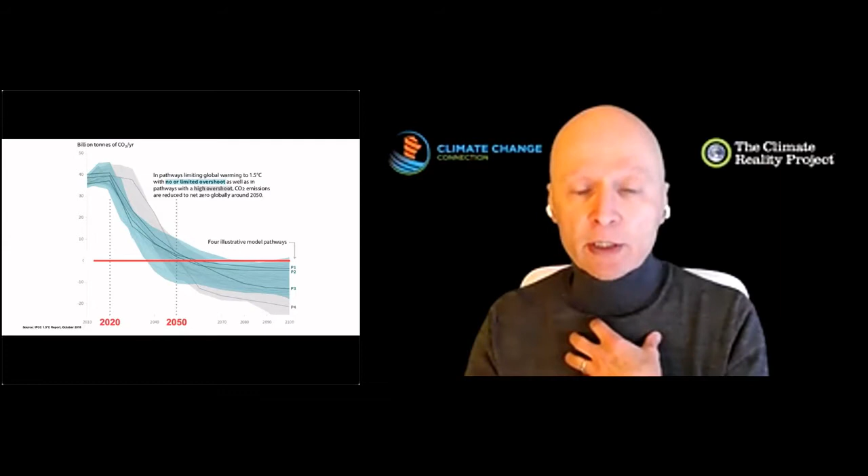Because even in Manitoba, if you talk about climate change, most of the time people go, oh, we're going to have warmer winters. Well, maybe, but there are also consequences that are much more dire for other people. We're talking about climate migrants. And when climate migrations happen on a large scale, potentially you wind up with global conflicts. And besides the human tragedy and devastation, there's also economic consequences. When those things may be happening halfway around the world, and we don't necessarily see them other than on the news, the economic consequences can be immediate and felt here very sharply.

So we have a challenge that we need to meet. If we're going to address that, really what we're talking about is building our resilience. In other words, we have to be able to meet our essential needs ourselves without fossil fuel. And when I talk about essential needs, we're talking about the three areas of food, transportation, and shelter. So there are questions within those three areas, challenges that we need to address.

We need to be able to feed ourselves locally without fossil fuel fertilizers. We need to be able to move all goods and people without gasoline or diesel. And then the challenge we're dealing with here today: we have to be able to heat all of our buildings, old and new, affordably and without natural gas. That's the challenge before us, and what we're addressing here today.

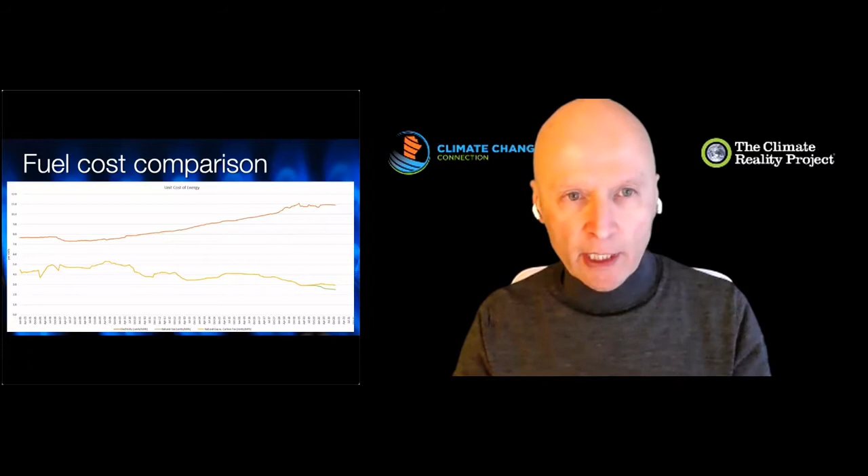So the cost of natural gas is not working in our favor. The cost of natural gas is going down as the cost of electricity is going up. So that's working against us.

But hydro could make more money if they were to sell electricity at the domestic rate rather than exporting it at the 2 cents a kilowatt hour that they have been in the past. So there's opportunity for hydro if they were to sell more domestically. And our economy is currently leaking money by importing these fossil fuels.

So there are opportunities when it comes to addressing this issue, this challenge. The pathway in general terms is, first of all, the envelope of our buildings, making our buildings more efficient. And we need to make our new buildings more efficient through an enhancement of the building codes. It's now not really as challenging as it needs to be, put it that way.

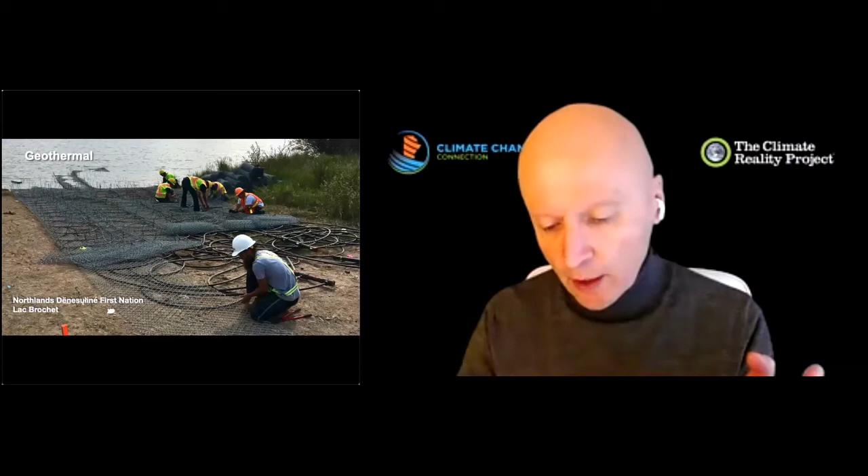Heating - making more use of solar passively, making more use of biomass, making more use of district heating, and the three key aspects of heat pump. We've got ground source heat pump, lake or water or stream-based heat pump, and air source heat pump.

And I called up the wrong presentation. The last slide that I was going to show has to do with energy storage. Energy storage is where we can take these renewable sources, which are intermittent, and store the energy. There's various strategies for that, including batteries or chemical storage potentially, or the use of hydrogen, electrolysis, hydrogen that comes from electrolysis.

So that, in a nutshell, is the frame that we're going to be diving into more deeply now with our next presenter. Our next presenter is going to be Donald Proven. Donald is a certified passive house consultant and tradesperson. 8 years ago, he and his uncle Randy and his cousin Evan and his father Rick Proven started Sun Certified Builders Co-op. Sun Certified Co-op delivers outstanding high-performance building design, construction, and renovation solutions. They've been improving building energy performance in existing homes and building new ones using Passive House Institute energy modeling tools and building science principles. He has over 30 years of high-performance building experience. Donald, please give us your perspectives on this challenge.

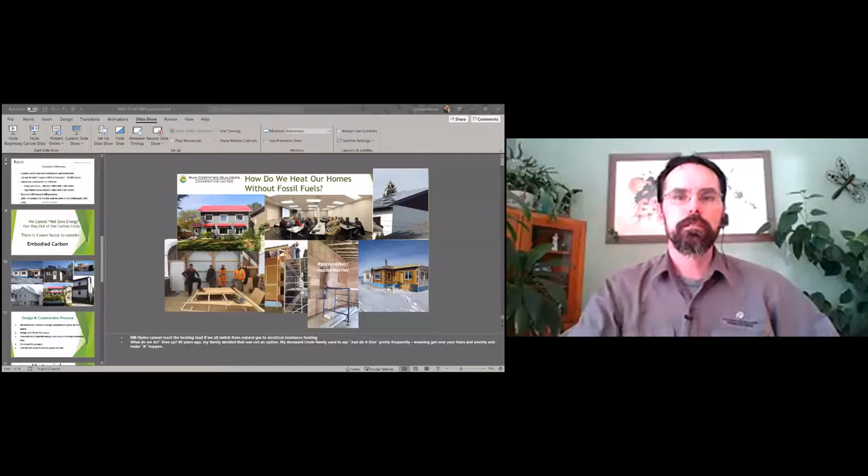Kurt invited me to the Sustainable Buildings Manitoba event, and the question was, how do we heat our homes without fossil fuels?

Our take from Sun Certified's perspective is to do what we've been doing all along, which is build high-performance buildings. This is just a quick sample of some of our projects. Some of the folks on the call here live in a few of these houses.

One of the key aspects to achieving this goal, heating our homes without fossil fuels, is education. Pre-COVID, we were able to travel to Alaska to do a presentation on this very thing. There was quite a turnout, as you see, in Anchorage, and it was kind of an interesting experience for us. We hadn't done really anything down in the States before.

So I want to jump right into solutions. Kurt touched briefly on some of the basics, and I'm going to do that as well. It comes right down to how do we reduce the building energy demand to the point where we can switch to electricity.

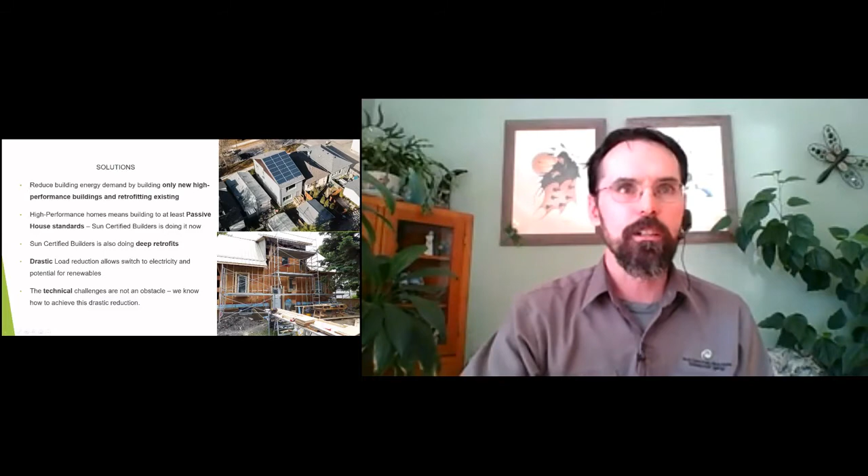In our view, the technical challenges are no longer an obstacle. We're trying to build our walls, prefabricate them off-site, and have them shipped to the site. There's what it looks like. We don't have a grand factory yet, but we're going to.

We're continually trying to improve what we do, because the building trade or building industry has undergone a significant change in the last 15 years or so, but most of that is related to technology. The design, modeling, and technique aspects of how we go about building, especially single-family dwellings, has really lagged behind, we feel.

There's been changes in the way we go about building larger buildings, which we don't involve ourselves in so much yet, but there's been lots of progress there. However, the single-family dwelling industry has really lagged behind. We always say that we're still stuck in the 1950s in terms of how we build our single-family dwellings.

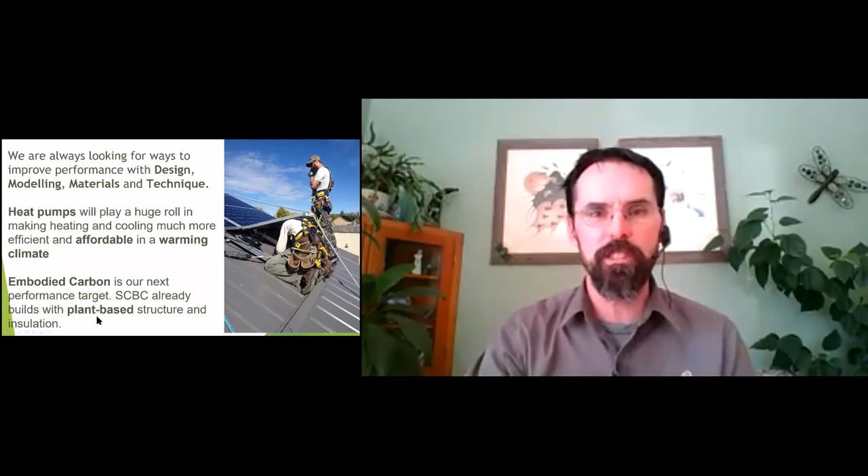Because the building industry can have a fairly significant impact on the carbon balance by using our buildings and how we do this as one of the tools, that gives us a bit of leeway to address the other two key areas: food production and transportation in society.

If we don't do that, then we're missing these huge pieces of the puzzle. It can't be independent of those other solutions. We have to work with that. And if we have buildings that can store carbon for long periods of time, we feel we can contribute to the solution, and that gives us more time to deal with other aspects of society.

So in the design process, you have to set goals for your buildings. Otherwise, you're not going to achieve any sort of target. We're not going to achieve savings economically with durability or energy efficiency unless you have something that you're going to shoot for. So energy, durability, comfort, carbon, and economic performance have to be targets that we're shooting for. Passive House, as I mentioned, is a tool that we use to provide us with targets and methods and modeling to achieve those high performance buildings.

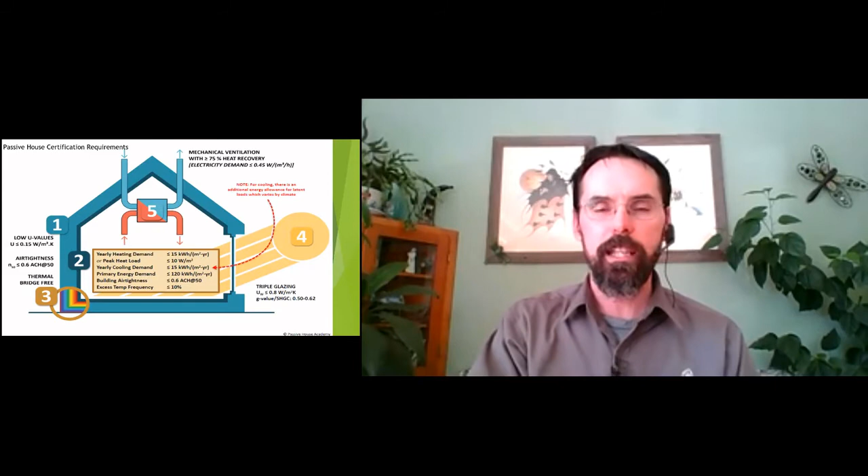These, again, are the principles that guide how we do the buildings. Thermal insulation, Kurt touched on that. The building enclosure - you have to start with the fabric of the building as part of your design. You have to have a system in place to achieve that overall building thermal performance. You can't have parts of the building poking to the exterior that are going to conduct cold and heat and moisture. That's called thermal bridge-free design.

You have to have really good windows so that they don't leak and they don't make it uncomfortable to sit by at a cold -40 night. You have to have very good ventilation so that your building's not going to have problems interior with moisture and with stuffy air. You have to be airtight to begin with so that, again, you're not leaking that heat and moisture into the system.

And there's some simplicity of shape and some design that goes into designing these buildings.

I want to talk about economic efficiency because that's an item that comes up frequently. We get asked all the time, well, how much more expensive is it to build an efficient building? We have tools available to tell us that overall it does cost more generally, because we're putting in quite a bit of insulation, better windows, a heat recovery ventilator and things like that. But overall, when you decide to go down the high performance path, you end up with economic return almost immediately.

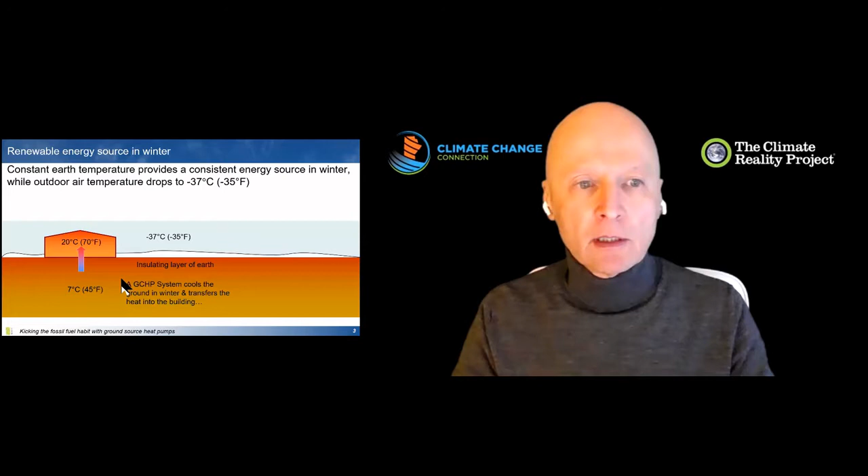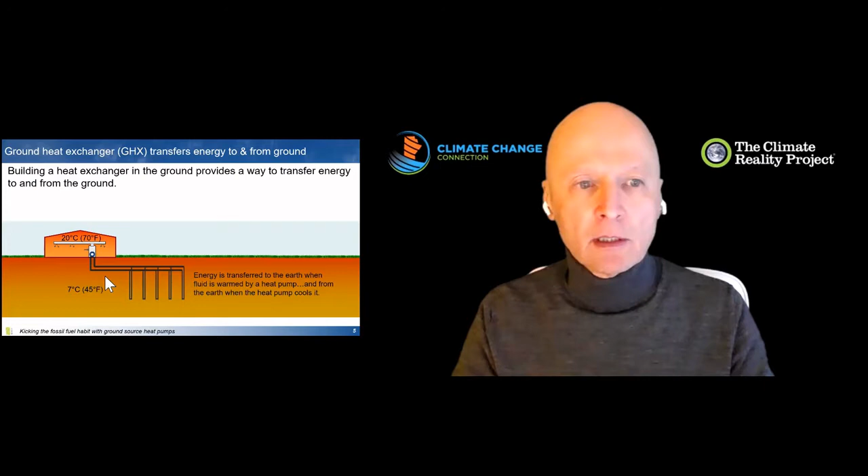Yep, okay. The ground itself in Manitoba is about 45 degrees Fahrenheit, or about 7 degrees Celsius, and we can pull heat from that very easily. Compared to an air source heat pump, the ground's temperature stays fairly constant, so it allows us to take heat from it all winter long without any auxiliary. It also allows us to dump heat into the ground very easily when we're cooling a building. The way we do that, basically, is burying plastic pipe in the ground, very similar to the pipe used by the gas industry to deliver gas to a house, but we're using it to move energy from the ground to the building.

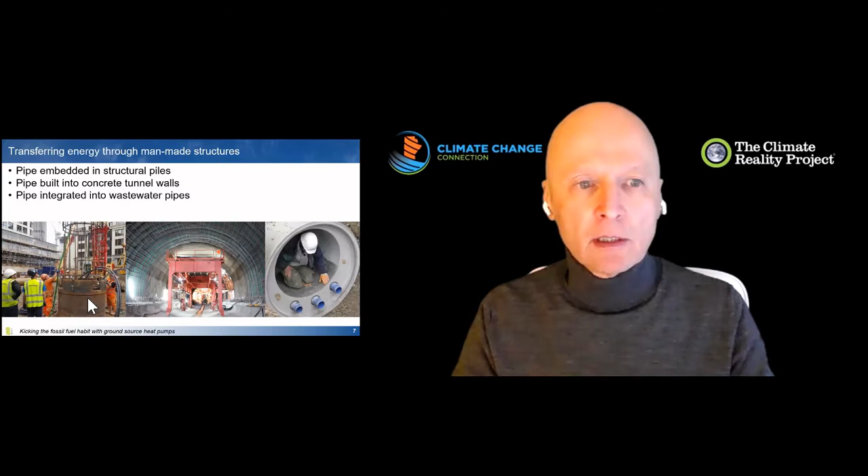Different ways of getting the pipe in the ground: vertical boreholes, laying it in large excavations, drilling horizontally, laying it in the bottom of a lake. People are starting to use it by integrating the pipe into foundation systems in buildings, tunnels for subways or whatever, sewer lines - a lot of different places that heat is available from.

One of the problems with natural gas is that if we're installing new gas pipelines right now, those pipelines are typically amortized over about 80 to 85 years. That's what helps make the cost of gas so inexpensive. So basically what we're doing is looking at what's starting to happen in a number of cities in the US. Let this play for a second.

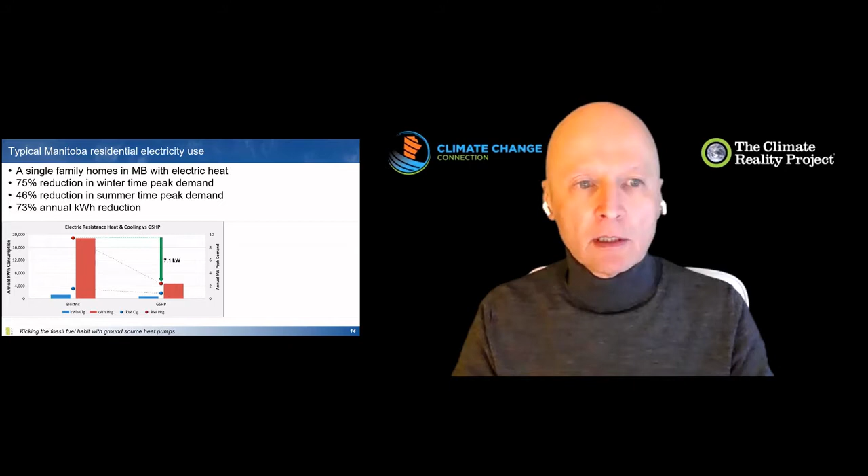So it reduces the kilowatt hour consumption by about over 14,000 kilowatt hours, reduces demand by about over 7 kilowatts. If we compare building the Keeyask Dam, those are the bars in blue, it produces less peak power than converting all of the electrically heated homes, just single family homes, to geothermal systems. It won't produce as much energy because the dam runs probably about 70 or 80% of the time, while we're heating the buildings probably about 30% of the time. The cost per kilowatt, either reducing the demand or the cost of making the power available, is reduced by about 60 or 70%.

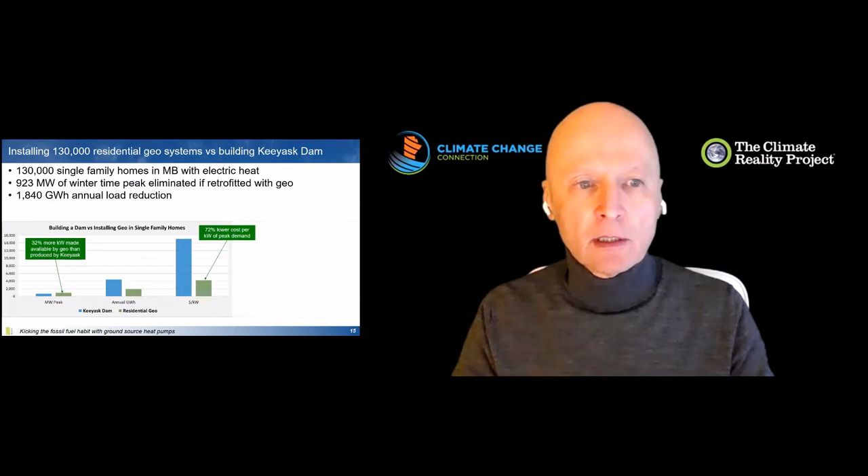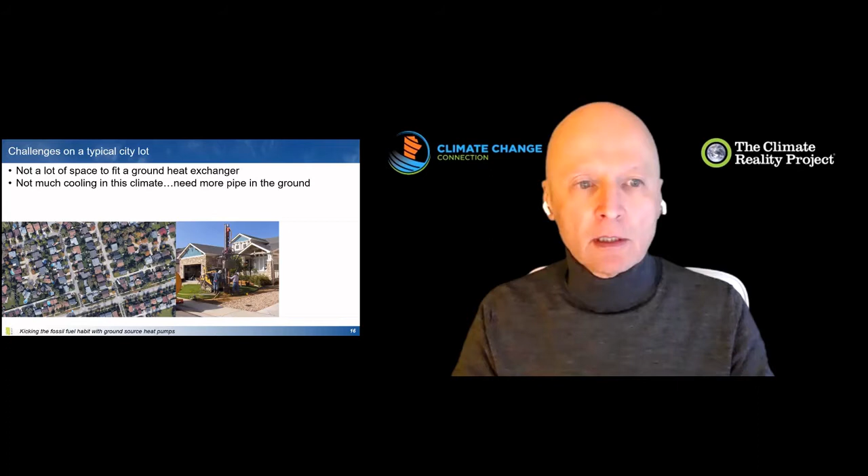Problems arise especially in areas serviced by natural gas, like in the bigger cities, where there sometimes isn't enough room to easily install a ground heat exchanger. A couple of options, and this is what I've done in my own house, is integrate solar thermal with a ground source system. Basically I'm taking solar heat and dumping it into a ground loop so that I've got more heat available in the winter, because in our climate we're drawing about 10 times more heat out of the ground than we're putting back into it. This helps balance the loads and makes the system operate a bit more efficiently.

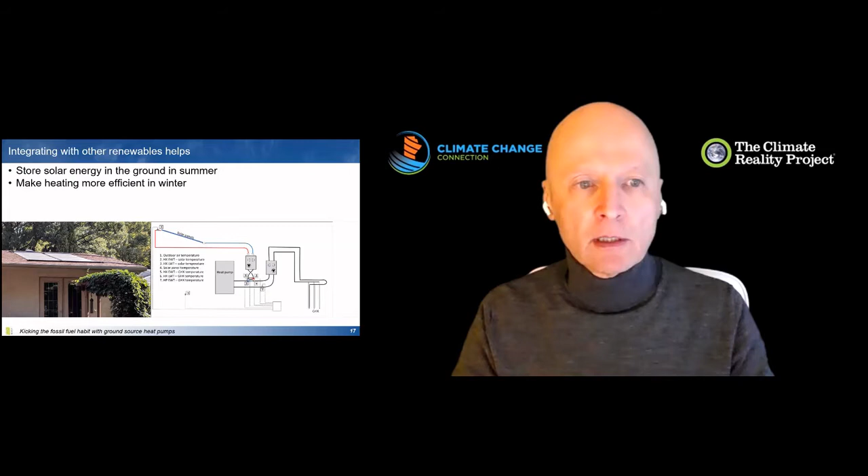On a larger scale, community scale, there are district energy sharing systems that can work and are being built in cities right now, including by gas companies in Massachusetts.

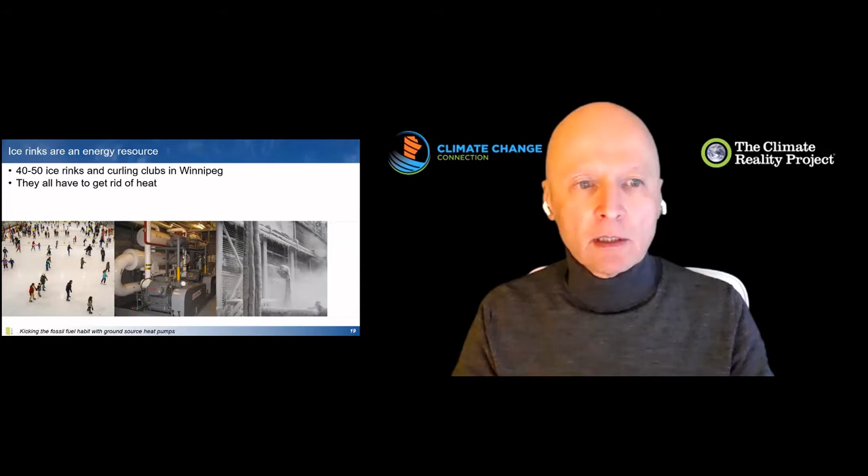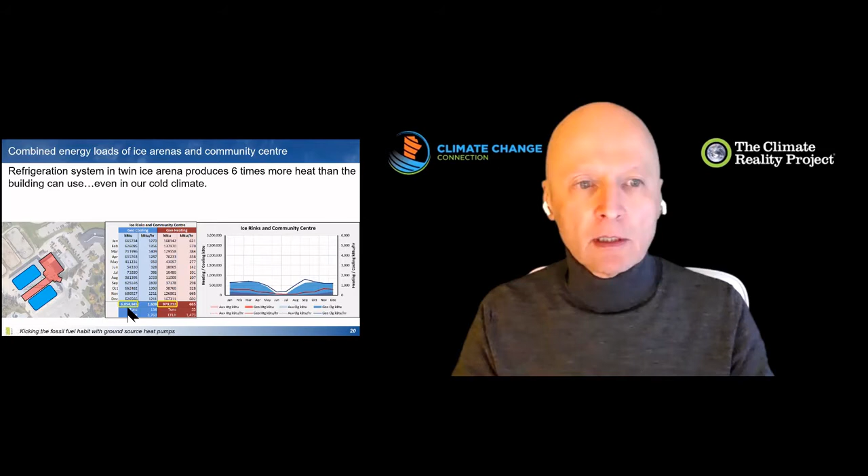Examples: almost every Canadian community has an ice rink. Winnipeg has about 40 or 50 ice rinks, ice arenas, and curling clubs. They get rid of a lot of heat, just dissipating it into the atmosphere. If we take a twin hockey rink, based on the Dakota Community Center, we can't use all of that heat to heat the building within that building itself. This graphically illustrates how much cooling is done versus how much heating is needed in that building, so we're getting rid of an awful lot of heat - about 6 times more heat is being dumped into the ground than we're pulling from it.

There are several nearby buildings, including the community center, a library, a school, and a personal care home - 12,200 square meters of building area - and even that can't absorb all of the heat that's available and wasted from the ice rink.

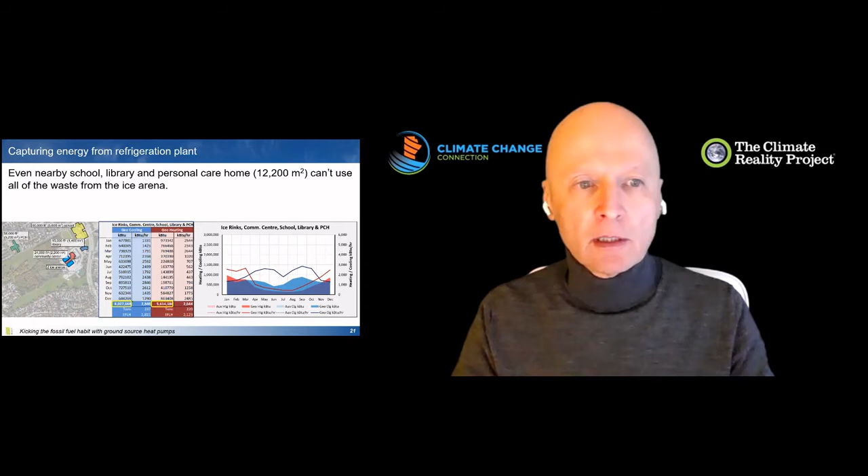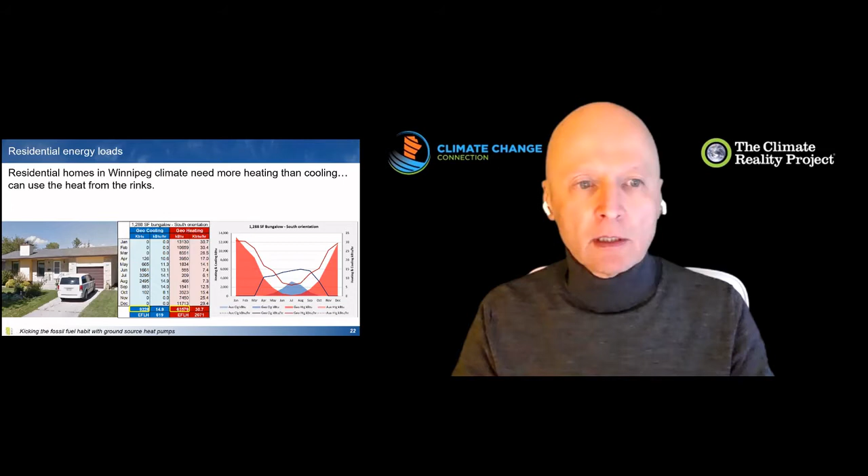A typical energy load profile in a Winnipeg house does an awful lot of heating in a year and a bit of cooling in a few months in the summertime. If we connect a number of homes to that system as well, in this case we're looking at about 109 homes that can be connected before we balance the amount of energy we're getting rid of from the ice rinks with what we can use to heat the houses and buildings right around that ice arena.

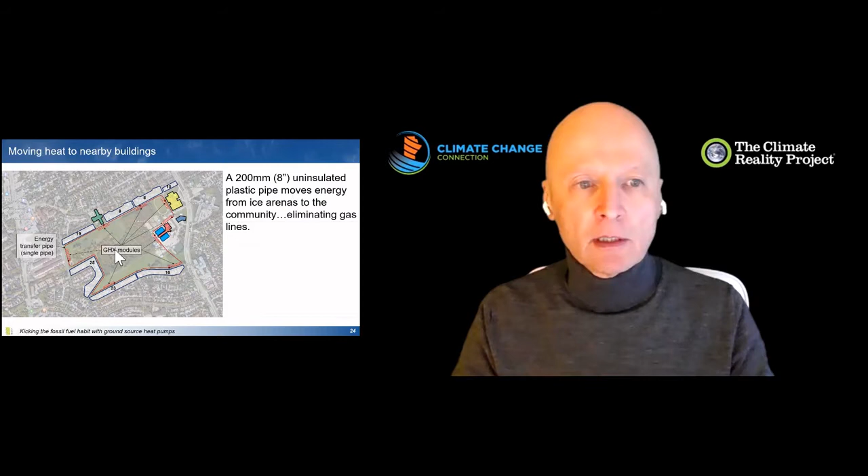University campuses are starting to do this. Ball State University, Missouri University of Science and Technology, and Colorado Mesa University have already converted their campuses like this, and this can be done cost effectively, one building at a time. As the budget becomes available, they can add more buildings and more ground heat exchanger.

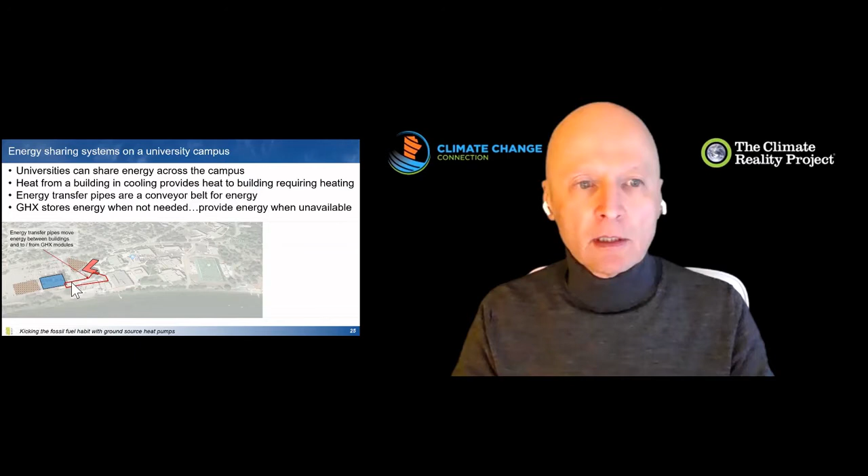Connecting the buildings to each other and to the ground heat exchangers allows us to move heat from buildings that are being cooled to buildings that are being heated. This can be expanded organically to other parts of the campus as we go through the whole project.

This is Bemidji State University in Minnesota. They're looking at 23 buildings, and all we're doing is moving energy around like a conveyor belt from one building to another, storing excess energy in a ground heat exchanger when we can't use it, and pulling energy from the ground heat exchanger when we need it in the winter.

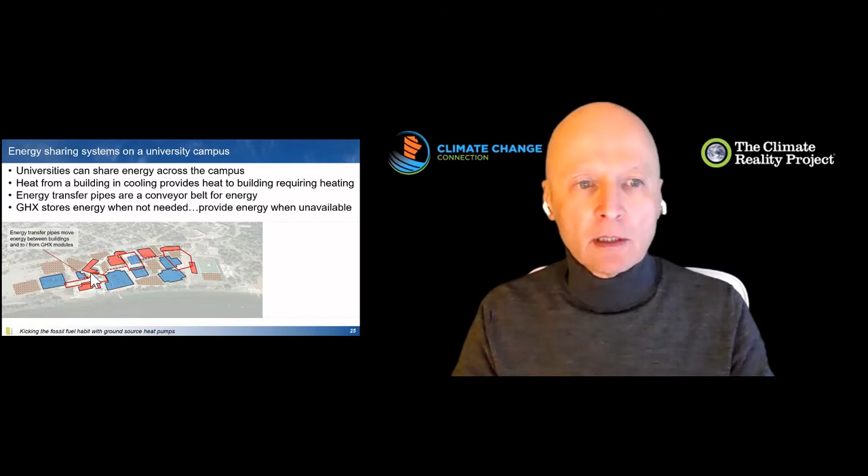Buildings that have been done in Manitoba include Alt Hotel, Steinbach Credit Union, Windsor Estates, apartments in Portage la Prairie, a school just outside of Morden, Arbor Gate School, Churchill High School in Winnipeg, a nursing center at the College St. Boniface, and University St. Boniface.

There's also a small district system in Winnipeg at the polar bear exhibit. You can see the polar bears and seals swimming around - heat is taken from that in the summertime to keep the bears cool, which helps heat some of the buildings, providing heat and vice versa.

In industrial applications, dairies use an awful lot of energy to cool the milk. They have to cool it within half an hour after it's milked. That heat, instead of dumping it to the outside, can be used to make hot water, which is used to clean the facility and to provide warmer water for the cows so that they drink more and produce more milk.

Potato storage facilities have to give off heat all winter long - that's the nature of the material. Same with nursery trees - they give off a lot of heat, and that can be used to heat the machine shop next door or the house on the farmyard.

Producing apple cider, the heat taken from that fermenting process can be used to heat the building.

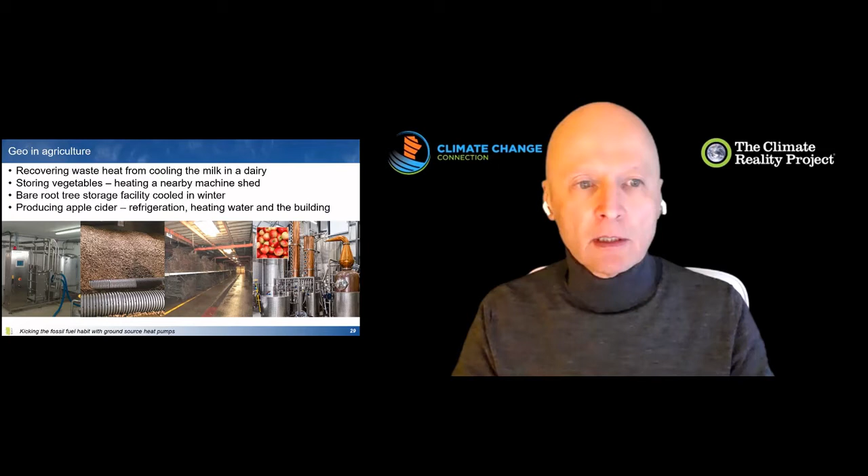On commercial buildings, one of the comments is that electrifying the buildings will require more energy. This is on a typical commercial building heated with natural gas - here's how much electricity is used during the year. The peak electrical demand is up to about 50 kilowatts in summer and about 20 kilowatts in winter, and this is how much energy is used in kilowatt hours.

If it's converted to a geothermal system, the amount of kilowatt hours actually goes up a little bit, which provides more revenue. More importantly, it reduces the peak electrical demand by about 40%. So instead of having a big peak load in summer and less in winter, it does increase the winter load a little bit.

But when you combine this with converting electrically heated homes to geothermal systems, the overall impact is very little on the current electrical infrastructure. It produces more kilowatt hours, which can be sold in Manitoba at a higher cost, giving more profit and revenue for Manitoba Hydro, and at the same time it doesn't impact their peak electrical demand - you don't have to build more dams to produce the power.

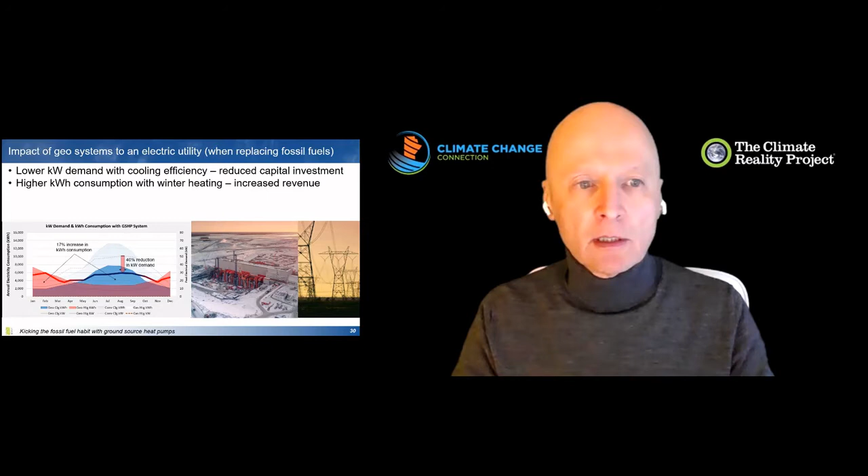It's already there. So buildings that have been done in Manitoba, and around the world - this is happening, and it's happening quite regularly. Thank you.

Wow, I'm always learning so much and getting inspired every time I see your presentations, and they're always different, Ed. But this is really mind-blowing stuff here. We'll come back to this. I've got lots of questions, but before we do, we're going to hear from Michael Stocki.

Hopefully I'm pronouncing your name right, Mike - is it Stocki? Stocki is good. Yeah, Stocki. All right, there you go.

Efficiency Manitoba is Manitoba's new crown corporation devoted to energy conservation. Its legislated mandate is to reduce Manitoba's electrical consumption by 1.5% per year, and natural gas consumption by 0.75% per year. Michael is responsible for residential, income-qualified, Indigenous, commercial, industrial, and agricultural efficiency programming. He has a bachelor's and master's degree in mechanical engineering and is a registered professional engineer. Please share your thoughts with us, Michael.

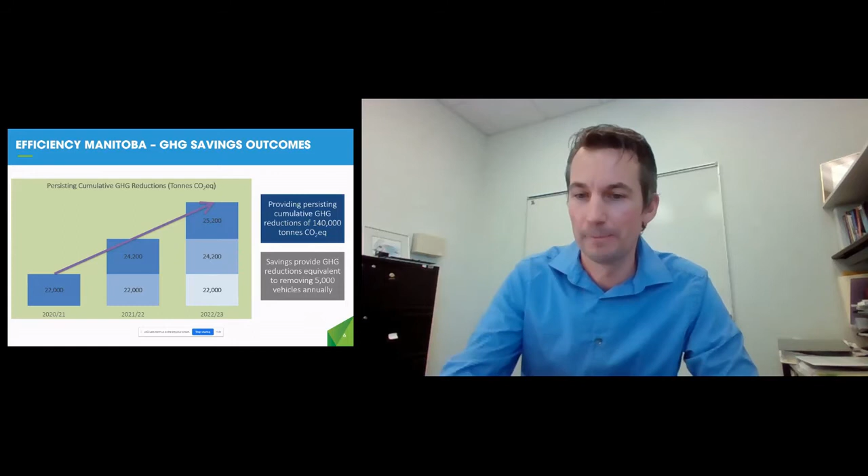So I want to next provide a little bit of context. I've heard a lot of facts and figures already related to the natural gas challenge and how affordably we can heat our buildings without natural gas, and I've got some additional ones, so I'll provide some of those.